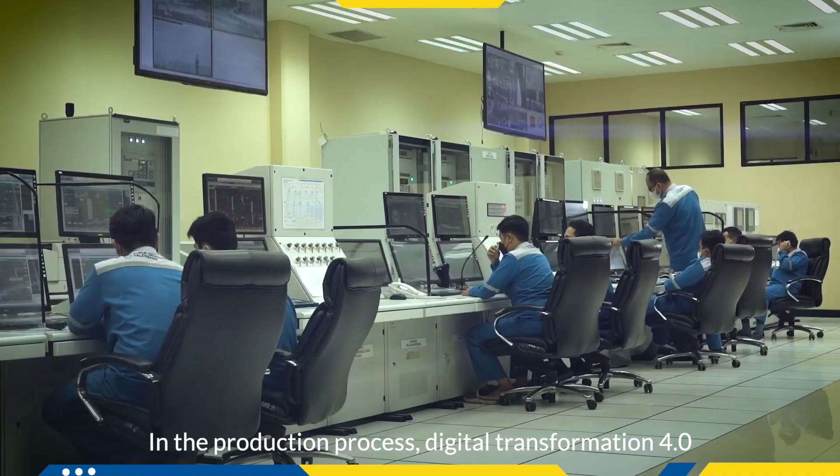Our products cover domestic needs and international markets, especially the Asia-Pacific region. Pusri strives to strengthen its business through digitalization and innovation initiatives. In 2021, Pusri received the Indi 4.0 award from the Government of Indonesia in the Aggressive Digitalization category. In the production process, Digital Transformation 4.0 is implemented through Pusri Smart Production.

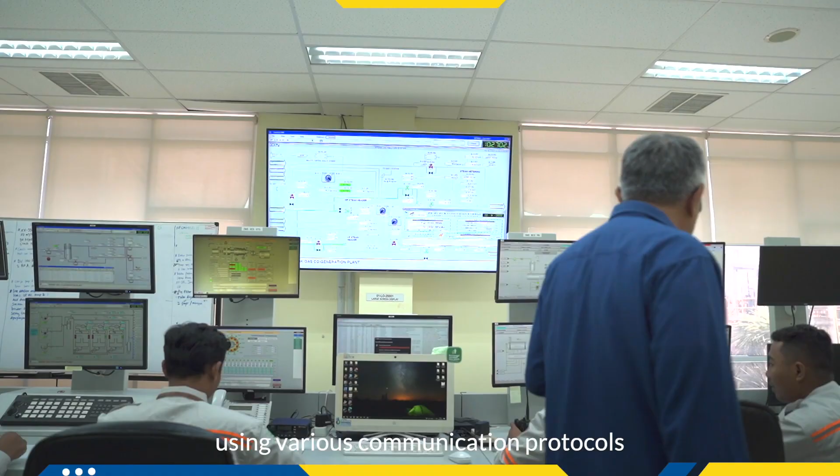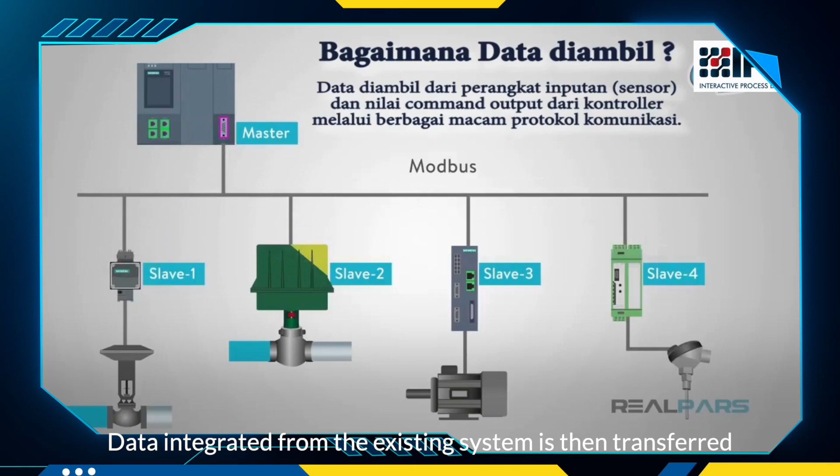Digitization of the plant process uses Interactive Process Display or IPD. Data taken from each automation and control equipment, using various communication protocols, is processed into digital data. It is then displayed on a user-friendly dashboard through data communication protocols. Data integrated from the existing system is then transferred to a mirror database and HMI mirror that can be accessed in real time through the internet network without disrupting the existing control system.

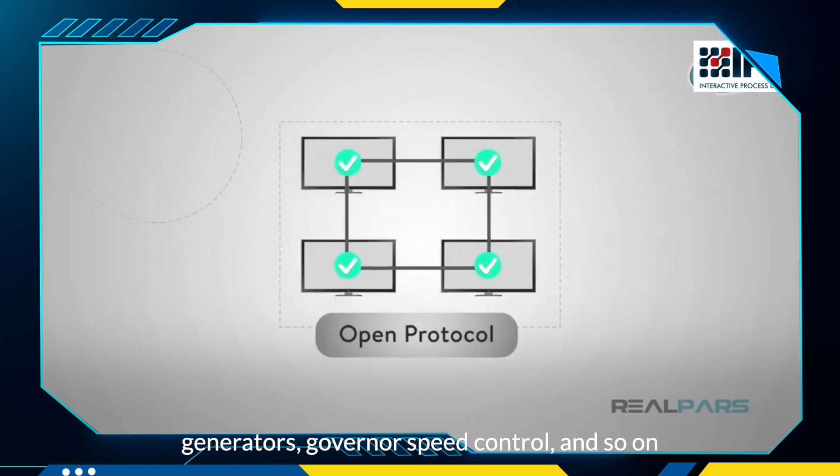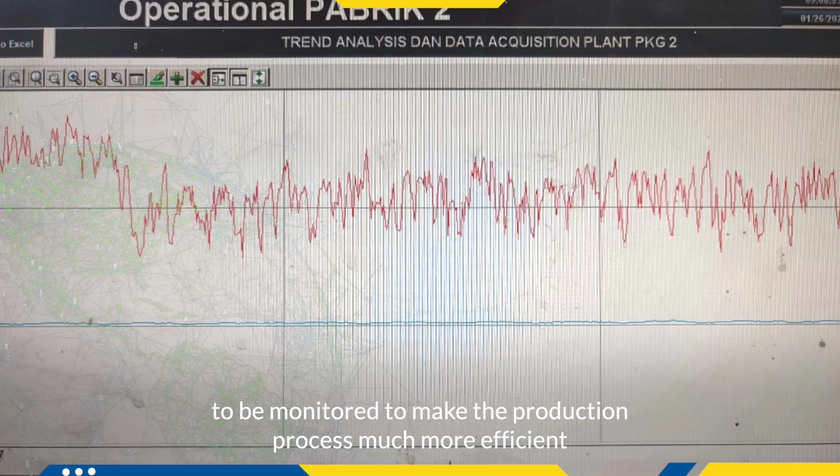Data in the HMI mirror come from all plants, including the petrochemical ammonia plant, and from all critical equipment, such as compressors, generators, governor speed control, and so on. The IPD system has an artificial intelligence feature that predicts most critical production parameter values accurately 1 hour in advance. Production operators get suggestions on which parameters to be monitored to make the production process much more efficient.

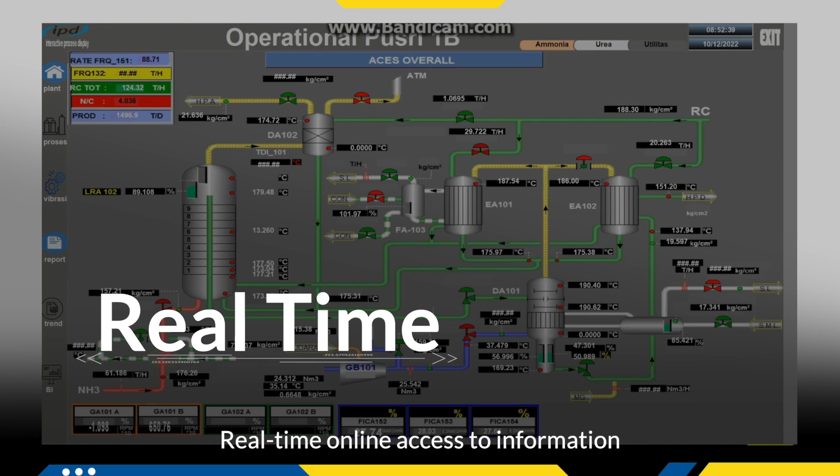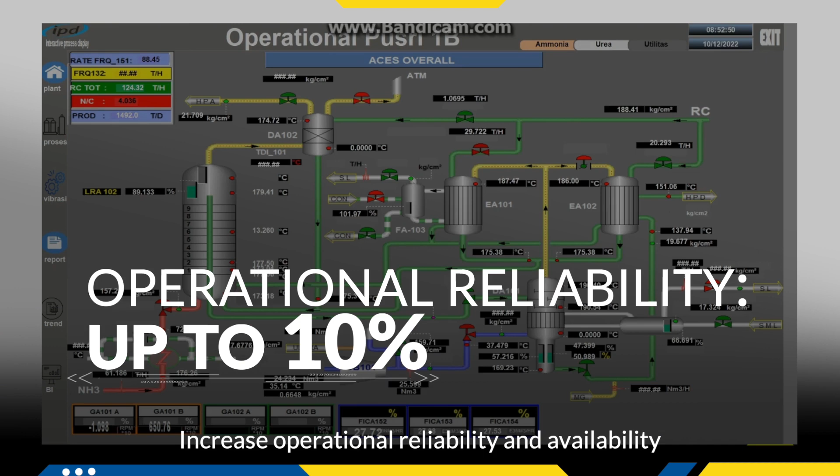These are some of the advantages of Pusri IPD technology. Real-time online access to information. Internal and external cloud database. Facilitate cause and effect analysis. Increase operational reliability and availability. Increase production efficiency. Decrease environmental impact. IPD is one of the most valuable industrial IoT solutions.

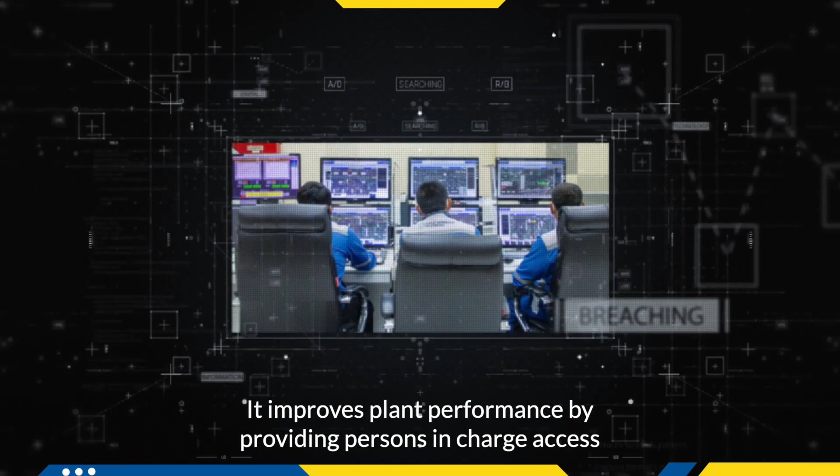Pusri Integrated Plant Management System, known as the I-PMS, integrates data and monitors plant operations via the internet. It improves plant performance by providing persons in charge access to monitor the plant's health from a sophisticated dashboard indicating key parameters of process performance. Automatic warning will notify whenever an instrument equipment becomes unstable.

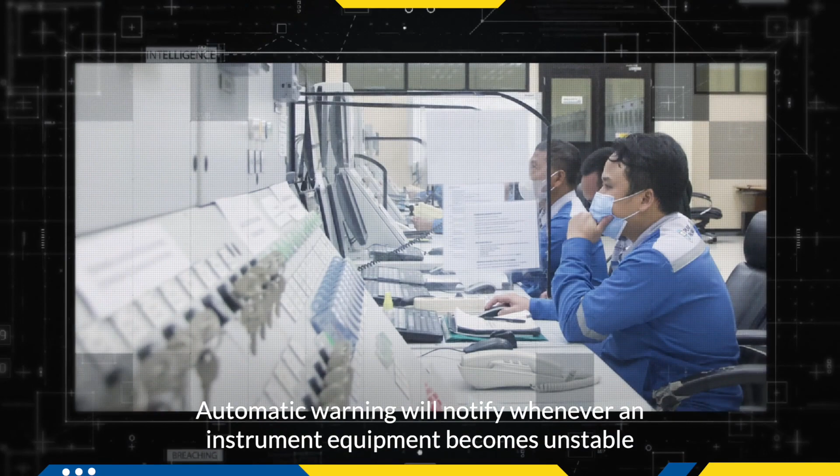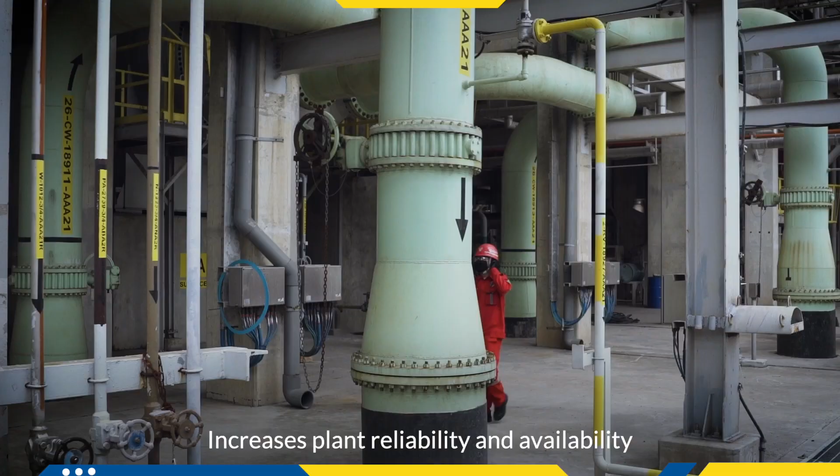Here are some of Pusri Smart Production's benefits. Overcome unscheduled shutdown caused by critical equipment instability. Increases plant reliability and availability. Increases urea production. Reduces operational costs. Speeds up reporting and data analysis for decision-making.

Increases stakeholder satisfaction. With smart production, Pusri attests its commitment to innovate processes, produce high-quality fertilizer, and achieve sustainable growth that can meet future needs. Pupuk Sriwijaya Palembang. Sustainable to the next level. Pupuk Indonesia Holding Company. We prosper with Indonesia.